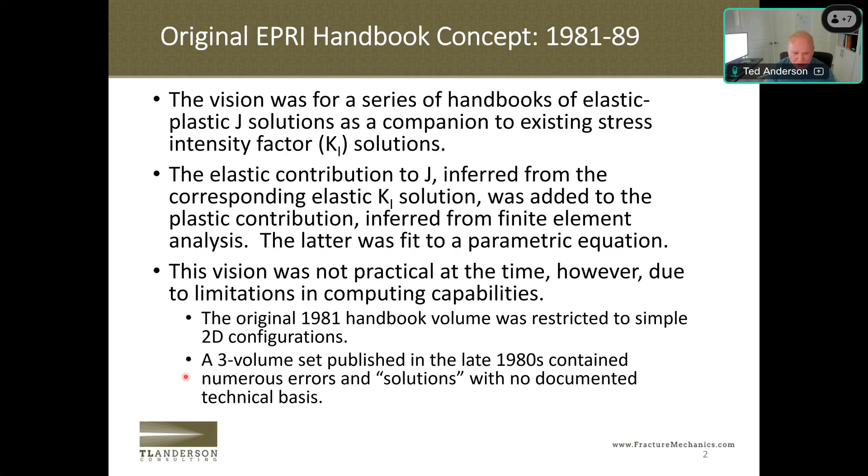Well, fast forward to present day, and obviously now our computing technology is much different than what it was in the 1980s. And so myself and the colleagues on the title slide embarked on a new project funded by EPRI to develop the handbook the way it was originally envisioned. And this involves, as you might suspect, a massive finite element study. And to date in this project, we've run nearly 20,000 three-dimensional elastic plastic simulations and fit those to equations. Now, as part of this project, we came up with a new equation for fitting J solutions, because the old approach had some issues with it.

In this first edition, which we're just getting ready to come out with, it's limited to a handful of geometries, just plates, cylindrical shells, and then a piping elbow connected to a straight pipe. And the reason why the cylindrical shells and the elbow to pipe geometries are prioritized is EPRI, of course, supports the power generation industry, and so their structural components of interest are pipes and pressure vessels. In the future, other configurations could be added, and the methodology we're using to generate solutions could be applied to, say, airframe components that are of interest down the road. Presumably the work wouldn't be funded by EPRI, but if the industry decides it wants to embark on elastic plastic crack solutions, we've come up with a methodology and a workflow procedure that would allow that.

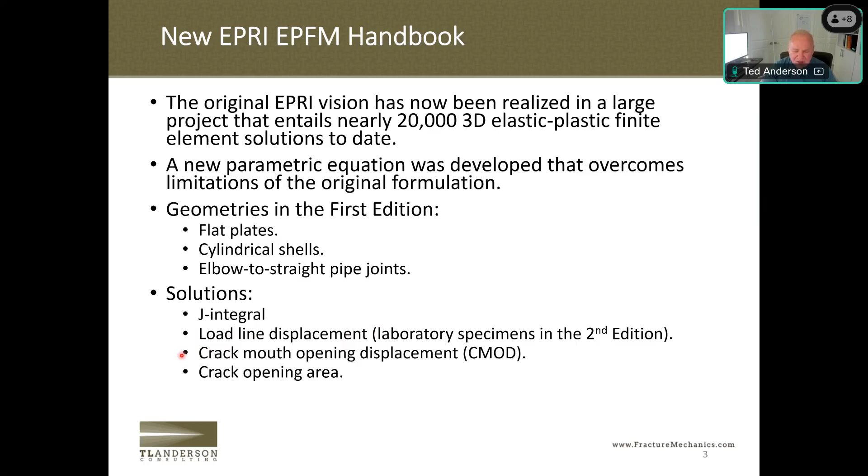So in the handbook, we've got solutions for the J integral. We will have some load line displacement solutions in the next edition, because that will cover some laboratory specimens. But with most structural component geometries, the load line displacement is not really a relevant quantity. But we're also computing and tabulating the crack mouth opening displacement solutions and the crack opening area solutions.

So a little bit about the parametric equation. We tried to make it somewhat physics-based. If you look at the deformation of a cracked body, at low loads you have linear elastic conditions. Then at intermediate loads, you'll have a plastic zone that's contained inside elastic material. And then you'll have the fully yielded ligament.

We know that under linear elastic conditions, the elastic J is proportional to load squared. And under fully plastic conditions for a power law material, this is what's called the Ramberg-Osgood stress-strain equation, where you assume a power law in stress. It was shown in the original EPRI work that the fully plastic J is proportional to load to the n+1 power, where n is a hardening exponent.

Now, in the contained yielding region, you can do some back of the envelope theory, and you can also run some FEA models, and you can observe that the plastic component of J in the contained yielding zone is a power law in load, but the exponent is neither 2 nor n+1. It's typically something in between those values.

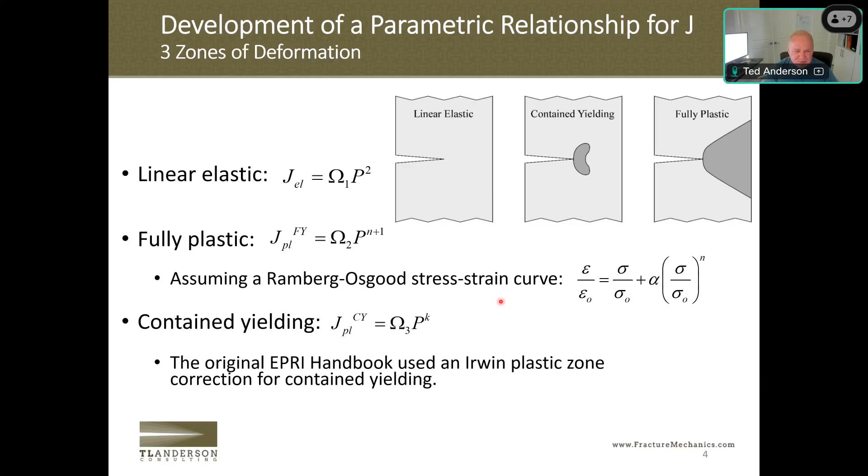Now, the original EPRI handbook just used an Irwin plastic zone correction for that contained yielding zone, the transition between linear elastic and fully plastic. It was kind of a Band-Aid fix, an afterthought really, and it doesn't work very well. So we abandoned that approach and came up with something a little more robust that fits the finite element solutions much better. So here's what the equation looks like.

So J is proportional to J elastic times the terms that depend on loading. This sigma ref is a reference stress, which is a geometry factor H1 times the nominal applied stress, and there's a yield over modulus adjustment. And then we have additional fitting constants: beta 1, M1, and gamma 1. These are fit to the finite element results and then tabulated in the handbook.

The middle term in this equation captures the fully plastic J, and the last term captures the contained yielding zone. If you care about the math, at low applied loads this term is significant, and the fully plastic term is small, because n might be a big number like 10. So this is stress over yield raised to a large power. So it's a very small number below yield, and it can be a very big number above yield.

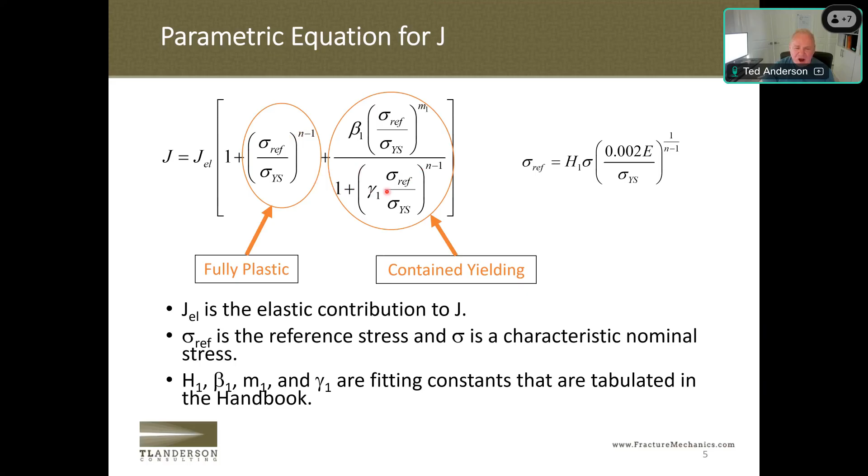The functional form here is such that as we get into the fully plastic conditions, this denominator causes this last term to disappear, and then the middle term takes over. In terms of plotting the results, it's convenient to plot J integral results in what's called a failure assessment diagram. If you've seen fracture codes and standards like API 579 and the British standard BS 7910, you may have seen this diagram before.

It's simply a non-dimensional way of plotting a J integral solution. If you take the elastic K divided by the K computed from J, which is equal to the square root of J elastic over J total, the failure assessment diagram, this dimensionless curve, will tail downward. It's convenient for fitting because when you're fitting a monotonically increasing KJ or J solution, the very large values get weighted more in the regression than the smaller values. It just gives you better fitting.

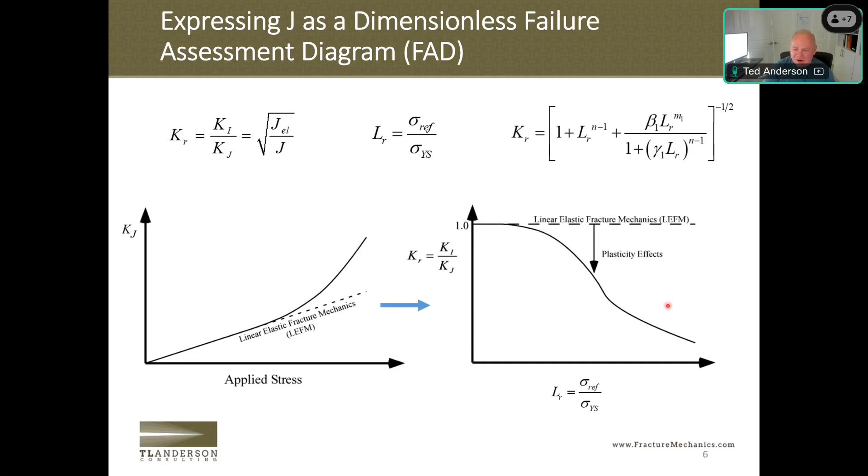Here's a couple of examples of fits to FEA results. The J versus load curves, when plotted in these dimensionless coordinates, do depend on geometry. You see this has a kind of gradual tail, and this other curve is a crack that's 20% of the wall thickness. And here's one that's 60%, and the curve does have a different shape. You see that the function does a fairly good job of capturing the shape.

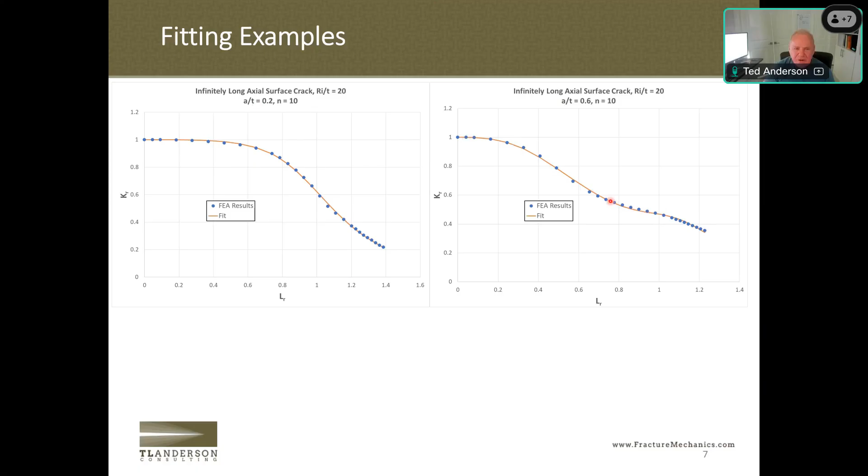Here's some examples of meshes. Again, we've run about 20,000 of these, so we have to have a way of producing meshes quickly in an automated sense. So we use commercial software called FEACrack, which was developed at Quest Integrity. Actually, it was originally developed by my consulting company that I had from 1995 to 2007 before I sold it to Quest Integrity. So I no longer own this software in terms of the intellectual property, but I still use it in my everyday consulting work.

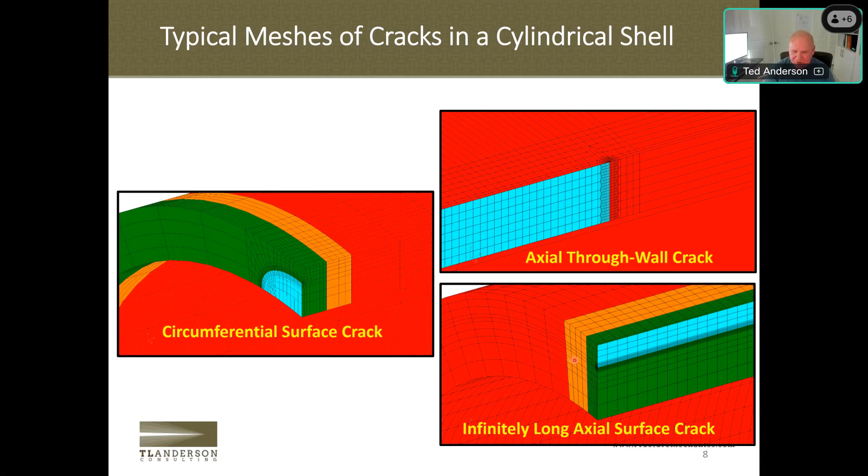So here's a circumferential crack, an axial through-wall crack, and a long axial surface crack. These different colors correspond to different material groups; you can assign different material groups here for doing a weld. I use the weld geometry just to help affect the mesh around the crack, so we have lots of nice regular element shapes there. This is just 3 examples out of the tens of thousands that we've done.

So how do we generate 20,000 solutions and then fit them? Well, as I mentioned, we build the mesh with the FEACrack software, and then we use the WARP3D finite element software to solve it. Now, as I mentioned Bob Dodds at the beginning, those of you who know him know that he and his students and postdocs over the years developed WARP3D, and it's open source code that you can download and look at the Fortran source code and modify it if you feel like it.

And so, because Bob is the godfather of Warp 3D, for this project he went and made some modifications such that when you're doing a crack problem, the software now can calculate what the next load step should be based on how much K and J change in each load step. If you run any elastic plastic analysis, you know that one of the challenges is trying to define the load step size. And if you're doing a whole bunch of crack meshes with different size cracks, you know that all meshes can't use the same load stepping.

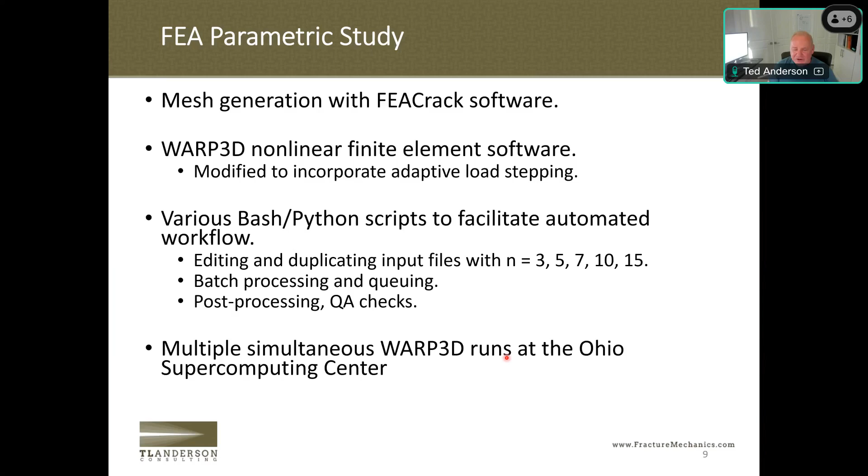Once we have all these solutions, then we have to fit them to the parametric equation, and that's a lot more difficult than it might sound. It's not a matter of just running through and doing a regression. We're generating tables of these four coefficients, and when you have four parameters in a fit, there's not a unique best fit. There's a large number of combinations of these four variables that will give you a reasonably good fit. So we're not necessarily looking for the best overall fit, because we want to have coefficient tables that allow you to interpolate within those tables to get these values.

Because if you allow the regression analysis to try to find the best fit, then each one of these parameters are not going to vary smoothly. They're going to jump around, and so you can't interpolate on the coefficients. So there's been a lot of effort in optimizing the fitting algorithm so that a given parameter, here H1, varies smoothly or monotonically in multidimensional space. And then the results are plotted as this dimensionless failure assessment diagram. We make sure that the fits are smooth and continuous from the discrete solution.

And they use a radial basis function. And if somebody asks me what that is in the Q&A, I can't even pretend to know what that is. So that's Thomas Desane who is taking care of that. So I just know that they worked really hard at trying to tune this fitting algorithm, because it has proved to be very challenging in order to have these coefficients that can be interpolated.

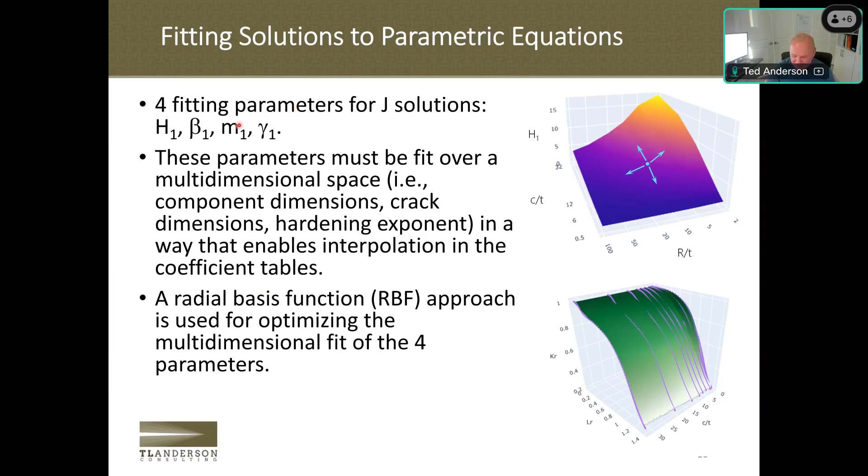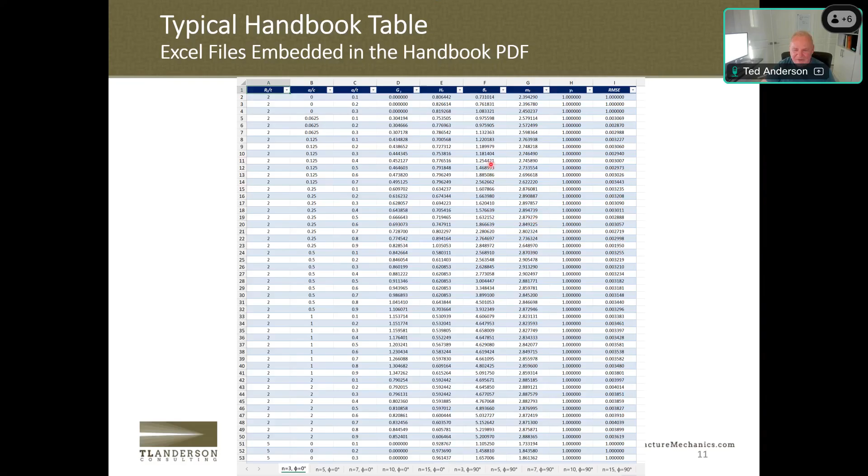So the nice thing for the end user is that if they want to actually apply this, they don't have to look at a static Word table and then re-enter the data, which is a process that's guaranteed to generate errors. So the end user will have access to the digital data in Excel sheets from the report.

So where are we on this? Well, the first edition of the handbook and the corresponding solutions has been completed and is in final review. There's some work as a result of the review. We found some unusual trends in some of the fits, and so the fits are being redone and refined. But the handbook is finished and is just being finalized.

I wrote a prototype app with Excel VBA where we loaded in all the tables, and I programmed the basic equations, and it can do basic crack stability calculations with these solutions. This is certainly not a commercial grade software app. It's mainly, as a first thing, to test all the solutions, run them through J analysis, and make sure there's no funny trends that we didn't anticipate.

But also for EPRI members who buy the report or get the report as members, this app will be part of that. And down the road, there may be a project to develop a commercial grade software app. And there's certain geometries that we plan to include but haven't yet included. So in 2025, we're planning on doing a series of additional solutions and then updating the handbook.

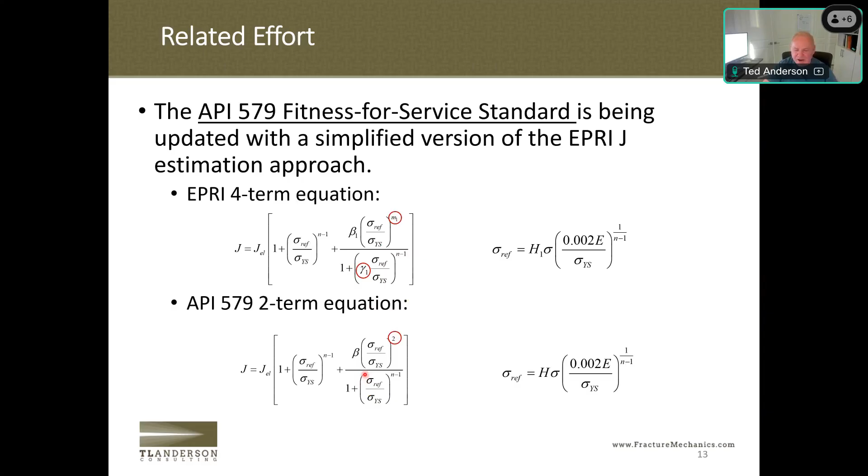So I believe that's my last slide. So with that, I'd be happy to answer any questions you may have.